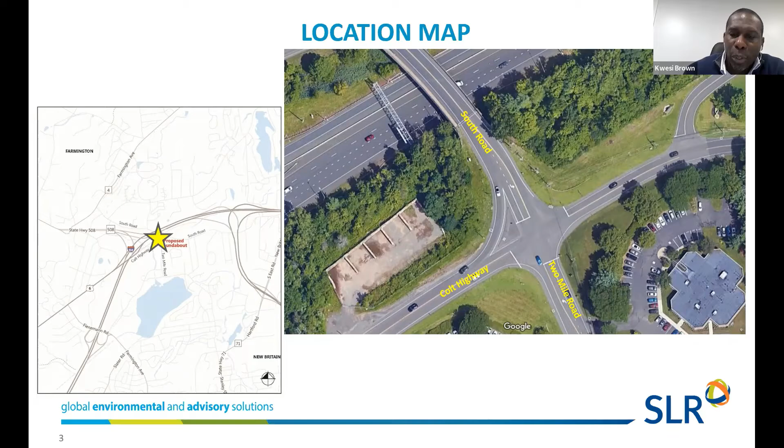Some of the issues Russ alluded to: congestion, particularly in peak hours, is very directional. In the mornings, going towards UConn Health is where you see the most queues, and in the PM, coming south from UConn Health is where you see the most queues. Safety is also an issue - there are some safety issues in terms of crash rates, and there's generally a lack of pedestrian accommodations within this intersection.

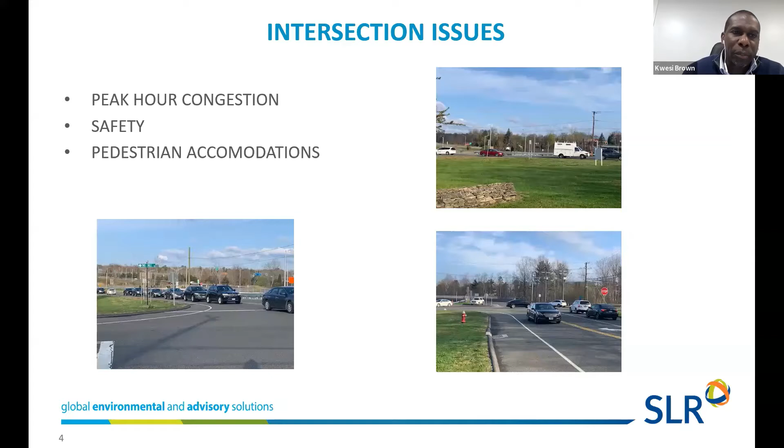So really the goal of the project is to improve safety, enhance traffic operations, enhance pedestrian accommodations, and also to bring about some geometric improvements at this location.

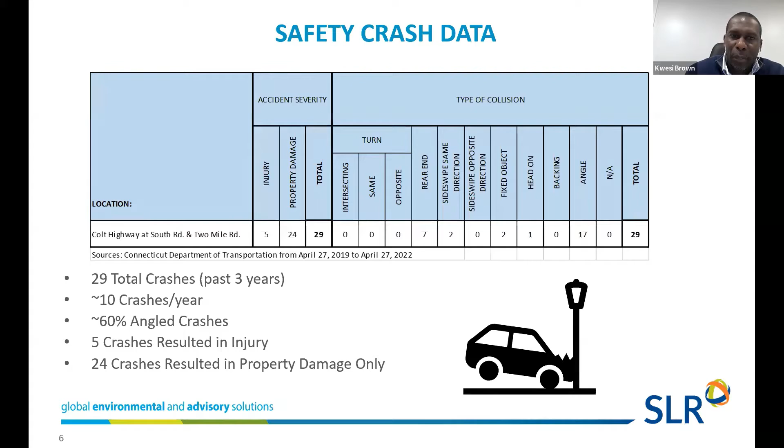So we started off by looking at safety. It's always very important, and we looked at the latest 3 years on record. We found that there were 29 total crashes. About 60% of these were angled collisions, which is very typical for an all-way stop intersection. 5 crashes resulted in injuries, and 24 resulted in property damage. There were no fatalities at this intersection over the 3-year period.

One of the reasons we chose a roundabout is the benefits it brings, in addition to traffic operations, in terms of safety. It's well documented that roundabouts typically lead to a reduction in crashes by about 35%, and about 76% reduction in actual injuries at an intersection. The benefits come because a roundabout brings a traffic calming effect, lower speeds, shorter pedestrian crossing times and crossing distances, and a whole lot of other benefits.

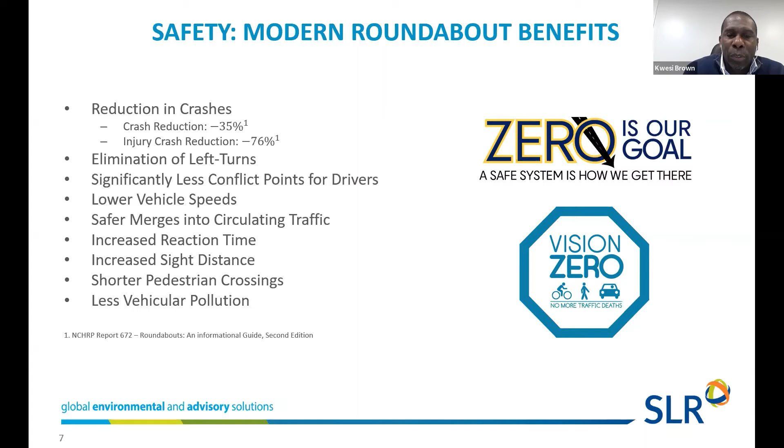That's why it was always thought to be a prime location to have a roundabout at this intersection. We also looked at traffic. We conducted traffic counts at this intersection in November of 2019 on a typical weekday, in the morning from 7 to 9, and in the afternoon from 4 to 6, and identified the peak hours for analysis.

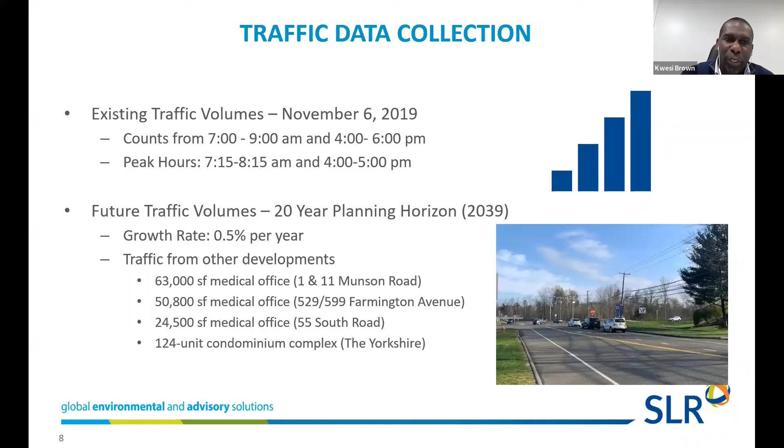We also did future projections. Typically for projects like this, you project traffic 20 years out, so we looked at a future year of 2039, using a growth rate given to us by Connecticut DOT. We also included traffic from other approved projects that had not yet been built at that time, as Russ alluded to, and included all of that in our future traffic volumes. This screen shows the schematic of the traffic volumes for the existing condition, as well as the future 2039 condition.

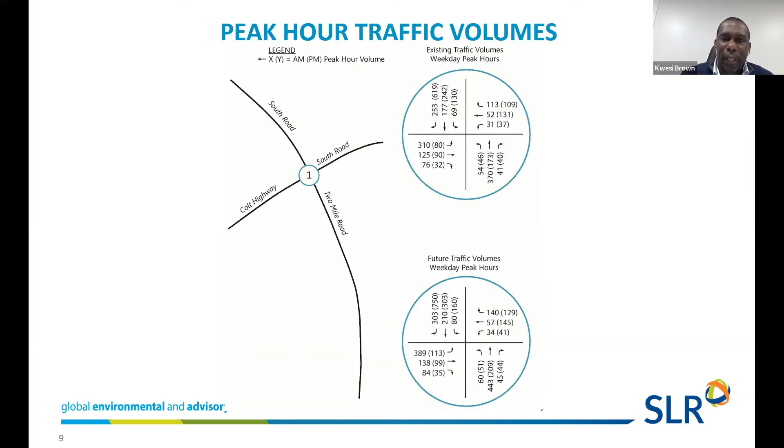We analyzed the intersection for existing and future conditions. Typically, Darlene, for your benefit, when we do this kind of capacity analysis we summarize results in terms of level of service, which is a qualitative measure of the average delay experienced at an intersection. Level of service A through F is the scale we typically use. Level of service A is great—free flow with very little delay—and level of service F is a bad condition with a lot of delay, which is not really acceptable.

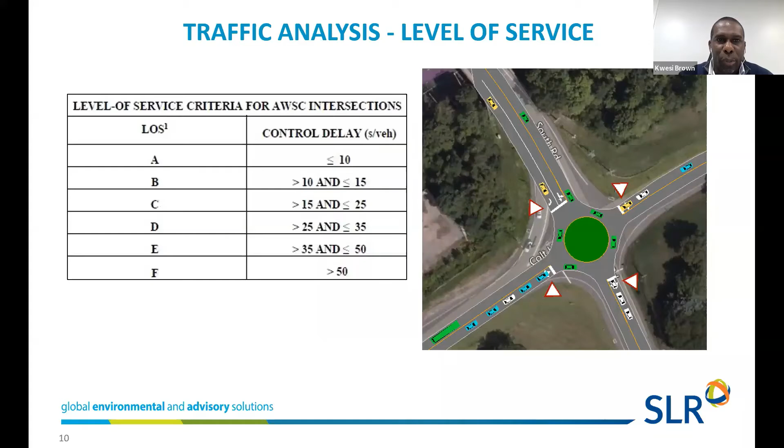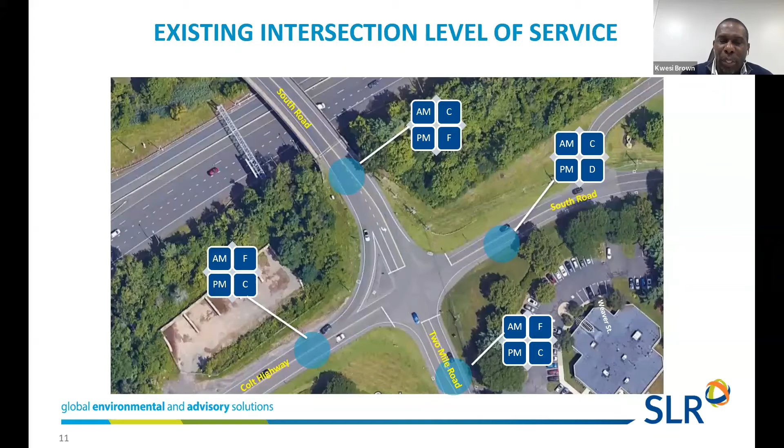The analysis validated the issues we were anticipating in terms of traffic at this intersection. Then we looked at a future condition without the roundabout, just the existing geometry with increased future traffic volumes, and some of these movements even get worse compared to existing conditions—you see more E's and F's in the future condition without the roundabout improvement.

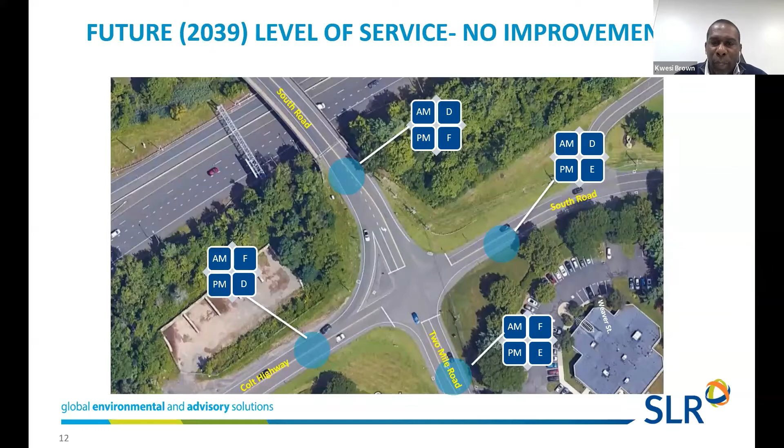So this set the stage for us seeing the need for this proposed roundabout improvement. With that information, we moved into the actual design of the roundabout. At this point, I'll hand over to Marc to give a brief overview of our design approach and some of the characteristics of the roundabout.

Thanks, Kwesi. Thanks, Darlene, for joining us. My name is Marc Mancini, I'm with SLR Consultant. Just so you know, we have one other person here that lives on South Road, so there's two of us. Okay, welcome.

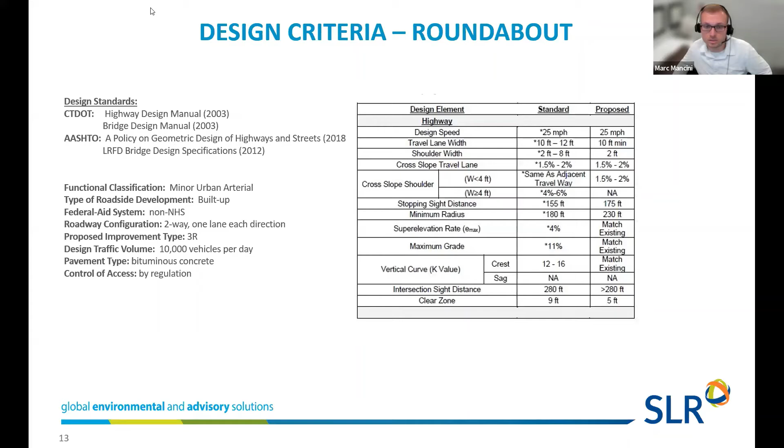Kwesi touched upon the existing issues with the current all-way stop controlled intersection. So where do we go from here? We know there's existing issues with the current intersection. So what we did at SLR is we worked with Russ in the town and with the Connecticut DOT on the design of a proposed roundabout that would suit all our needs in terms of safety, traffic congestion, and anything else that came up.

The design standards we used for the roundabout were based on standards laid out by the Connecticut DOT's Highway Design Manual and through AASHTO's Green Book, which is a policy on geometric design of highways and streets. We've shown a few of our design criteria in the table. For the most part, the roundabout has an inscribed diameter of 130 feet, so we'd consider this a single-lane roundabout, as you'll see on the next slide.

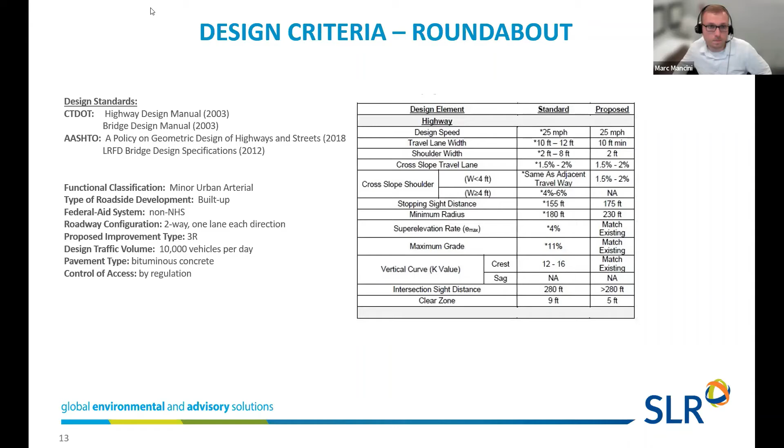We have single lane approaches from the south on 2 Mile Road, from the east on South Road, and from the west along State Route 531 Colt Highway. To the north, coming into the roundabout, we have our only multi-lane approach along South Road. And at each of the four approaches, we have proposed splitter islands.

Within these splitter islands, not only do they serve as a boundary between traffic, they also act as a refuge area for pedestrians who may be crossing at those crosswalks from sidewalk to sidewalk.

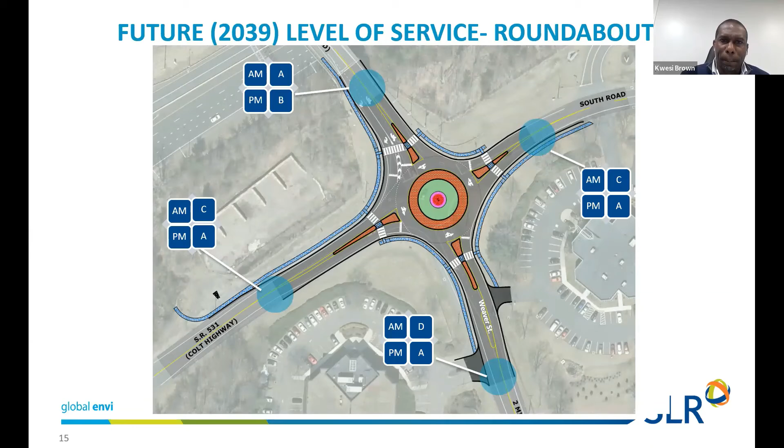So the sidewalks, Tracy, can you go back to that? Right there. Maybe, Dylan, while we're talking about this, maybe you could pull up our GIS or Google Maps. Yeah, I'll pull up the GIS.

Right now you can walk over the bridge on the west side, but the sidewalk, unfortunately, the property where the church is drops off significantly, so that we would have to almost move the road over towards what I'm going to call the Union Hall, the business on the corner of Munson and South. We'd have to push the road to that side so we could get the sidewalk in. Basically, right behind the curb there after the bridge, the slope is so steep, we can't fit a sidewalk in.

So if the CTfastrak is coming to that parking lot there, is there a UConn bus that would pick up people that would potentially ride the CTfastrak and then go to the health center? They talked about it. I don't know what the last outcome is of that. I know they were talking about how to get commuters from the new park and ride to UConn Health Center.

I don't know what the bottom line is from that, but we could find out. It seems like it would make sense if that was the whole purpose, is to get people to ride a bus to get to work, and they don't have a safe way to get there. It'd be kind of a moot point.